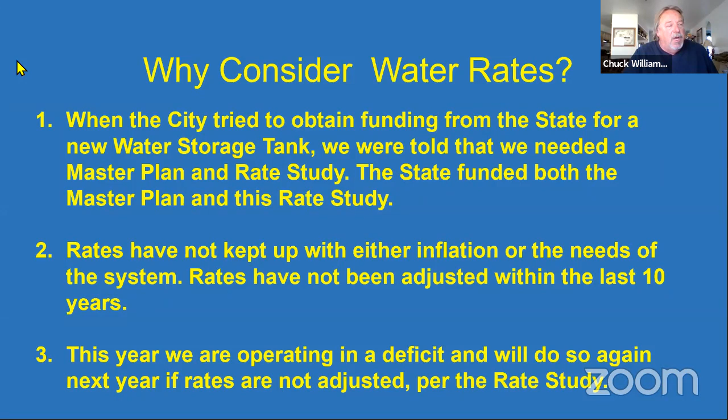This year, we are operating in a deficit and will do so again next year if the rates are not adjusted per the rate study, for the analysis that you'll see a little bit later. Talk briefly about the water system condition.

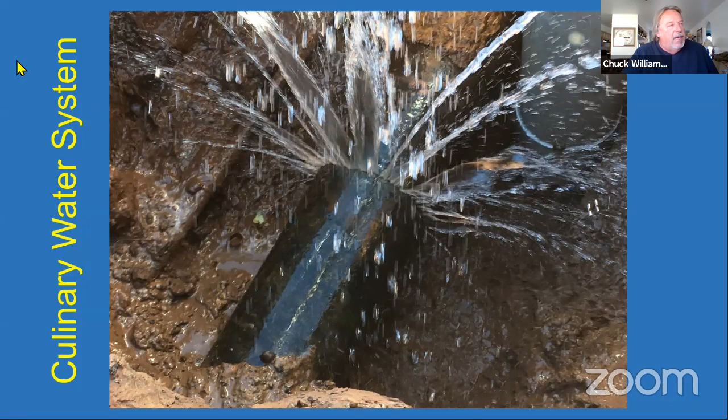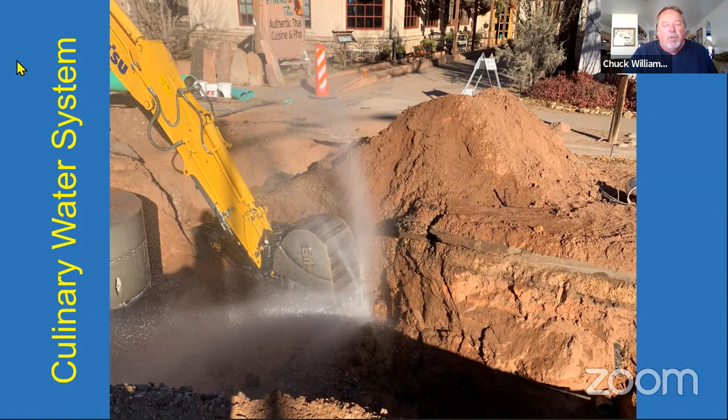Here's an example of one of our cast iron pipes leaking when it was uncovered. Another one, we got within 3 to 4 feet of this pipe, relieved the earth pressure from the side, and it just blew out. Some of our system is almost World War II era, we think, with some lead joints in fact. Here's an example of another pipe where the seam breaks. This is a cast iron pipe.

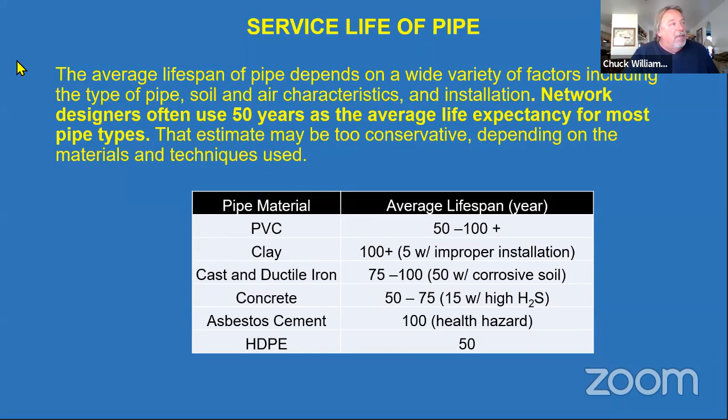Network designers often use 50 years as the average life expectancy for most pipe types. So if you keep that in mind, 50 years is when you should basically be replacing them. In 2018, Utah State University did a study on water pipes in the United States and Canada. And the thing I'd point out in this white box that's even more concerning is the break rates of cast iron and asbestos cement pipe, which make up 41% of the installed water mains in the US and Canada, have increased by more than 40% over a 6-year period.

Take that down to the second bullet. Cast iron pipe has 20 times more breaks in highly corrosive soils than in low corrosive soils. Corrosive meaning basically saline or salty soils. Moab has highly corrosive soils. Corrosion is a major cause of water main breaks, and utilities with a higher percentage of iron pipe may experience a higher percentage of corrosion-related breaks.

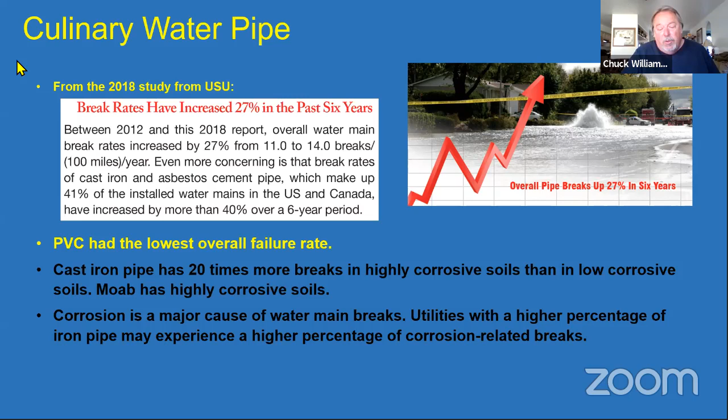So the takeaway from this slide is cast iron pipes aren't really a good thing to have in your system, because if you have highly corrosive soils, they'll break on you, and they'll break at any given time after 50 years. And the bad news is this is a breakout of our water system by material type. 36% of it's PVC or plastic pipe, essentially, and 62% is cast iron pipe. So we have old pipe that's not the right pipe for these type of soil conditions.

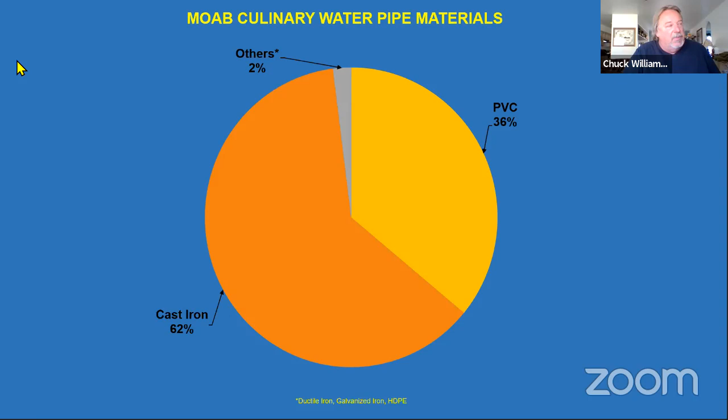An analysis of the age of our system and the length and mileage, and what that percentage of the total overall mileage is for pipes over 4 inches, shows that pipes that are older than 50 years and as much as older than 60 years make up 58% of our system. And if some of the unknown pipes come over into that, say 7%, we're right at 2/3 of our system over 50 years old. So that's why we have concerns about that.

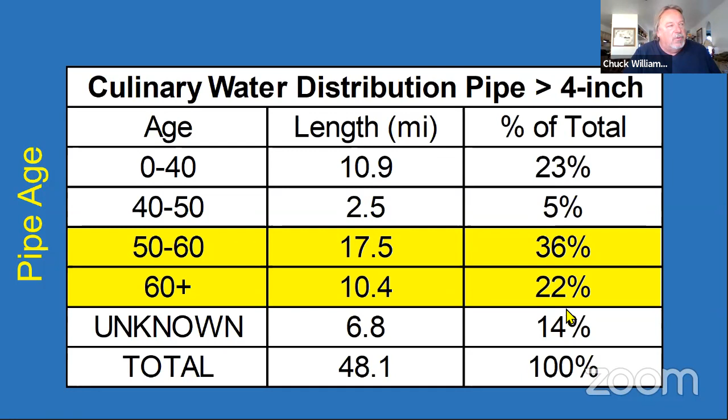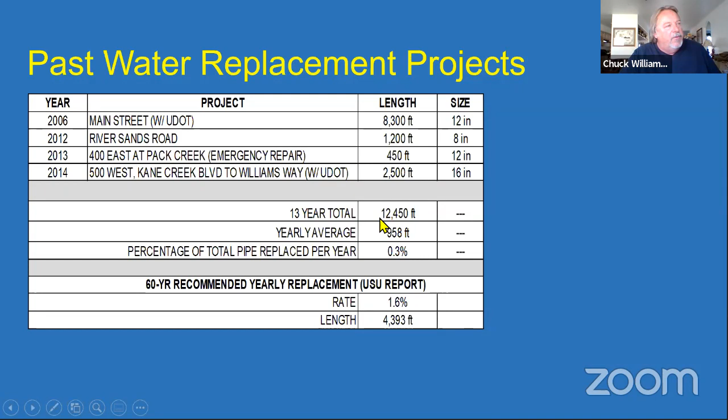We looked at past water replacement projects because we do have a water system and it is functioning now. And from 2006 until now, a period of about 13 years, we've installed 12,450 feet of pipe. Or if you just average it, that's about 958 feet. The USU report says that we should be replacing 4,393 feet per year for a system of our size. So we're doing 22% of what we should be doing in order to have a system that's maintained on average.

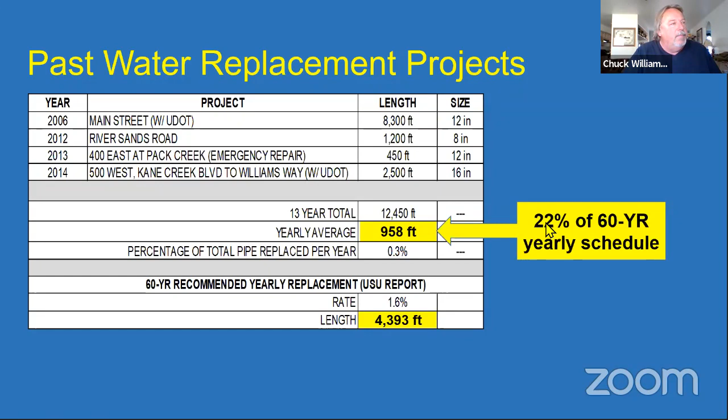Quick review of our existing facilities. Our system has 4 springs and 3 wells. 2 of the wells are culinary, 1 is for irrigation out of the golf course. We have 3 1-million-gallon storage tanks, about 48 miles of pipe. Our source protection area is about 28 miles now. That's going to change in the near future. We're working on updating those right now.

Total water use, between 1,800 and 2,400 acre feet per year. Number of connections, which I think is an interesting statistic, 1,746 residential, 562 commercial, or about 2,308 connections. Known issues, we have inadequate fire suppression in places. We have failing pipes. We have low circulation in the system extremities. We need things like more pressure reducing valves.

Budget source, fully funded by the Water Enterprise Fund. This budget year we're in now is $1.26 million for that fund, and we're operating in a $54,000 deficit this year.

Future facilities: that's what the water distribution plan did, it formed a framework for what our capital improvements were. I'll talk quickly about that. We need an additional 1,500 gallons per minute for source capacity. Source is essentially another well or two. Storage: we need another 2.2 million gallon storage tank. Fire flow projects are about $3 million. Those are future needs, and I'll show you a little bit more of those.

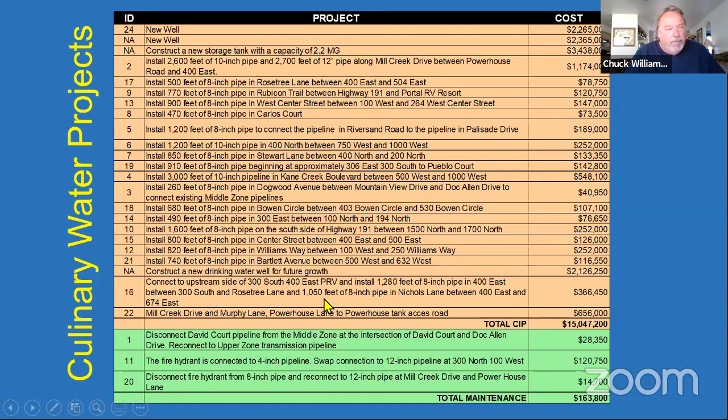Future projects: capital improvement needs are about $15 million, with major maintenance needs of $163,000. I don't expect you to be able to read this, but this is a list of all the projects, and there's the $15 million bottom line down here. They include 2 new wells, constructing the storage tank, and as you can see here, lots of pipe replacements. And then working on some fire hydrants for the major maintenance needs.

We made a presentation to the Water Conservation Drought Management Advisory Board twice in the last couple of months. Zions Bank had done some analysis of cities across the state, and we took theirs, and the board had said, well, what about cities our size, Chuck? Go look at the rates for them. I know this is difficult to read, but the base rate is the monthly rate, not dependent upon the usage rate, which is the number of gallons that people use. So some places have a base rate.

GWSSA, Grand Water and Sewer, does $21.75 a month, and you pay for every drop of water that you get. Other places, like in Moab right now, we have a base rate of $10 a month, and you get up to 2,000 gallons included in that, so you don't get charged for the first 2,000 gallons. For comparison, looking at the base rate up here, Park City is $50.55, the high, and it goes down through the list. Of the 30 cities we polled, Moab has the lowest rate at $10 per month. The average of those 30 cities is $24.89 per month, and GWSSA, our neighbor outside of the city, is $21.75.

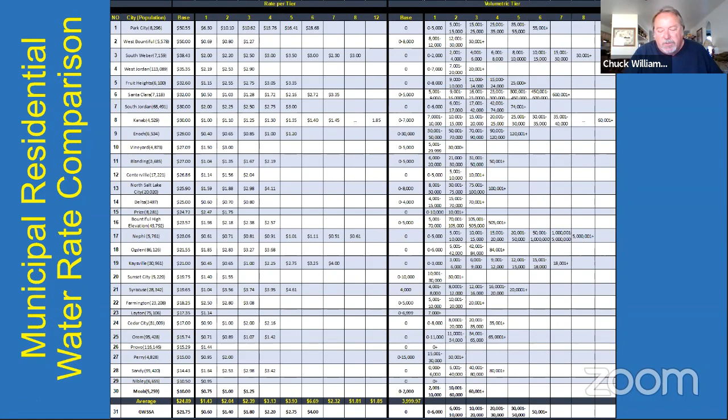But the water board suggested that we look at more cities that are just about Moab size. So here's 15 of those cities, and you can see the name of the city. I'll just pick West Bountiful. Here's the population, 5,578, and we're right at 5,259, so similar, certainly. Did the same thing. Highest rate was Park City. Lowest rate is Moab. Interestingly, the average for the smaller communities is actually higher than the average that includes some of the larger communities.

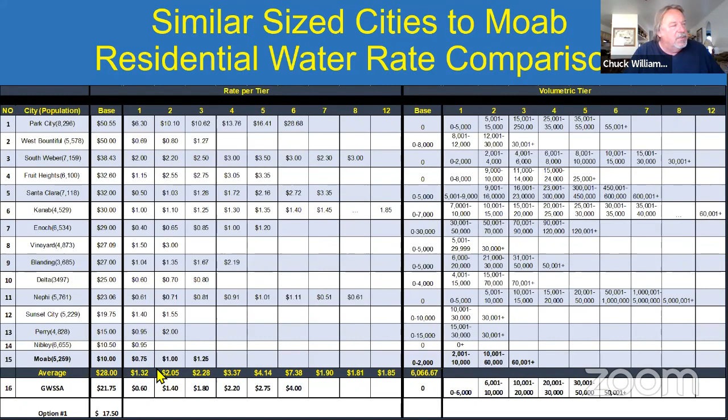We sent out the draft rate study. Kaylin had asked we send that out, so we sent that out yesterday or today. These options were based upon the good work Zions Bank has done, and I'll turn it over to Susie here in a moment. But this is a summary of what these options are. As staff with management and finance, we tried to come up with a range of options depending upon what goals council decides it might want to try and accomplish.

So you're going to see options here from taking care of addressing all of our capital needs, down to let's at least make up for that $98,000 deficit next year, but we don't address the capital needs significantly, if at all. And I'll let Susie talk more about that. But these are the quick options, and I'll have a table that's easier to read than this in a minute.

Option one, base rates would be increased next year by 75%, which would take it up to $17.50 per month. Residential usage rates would increase by 50% in 2021 and would be adjusted so that tier one includes the first 3,000 gallons. So in other words, that $17.50 a month base rate would allow you to get up to 3,000 gallons, which is about what an average family of 3 would use for a small home in a month.